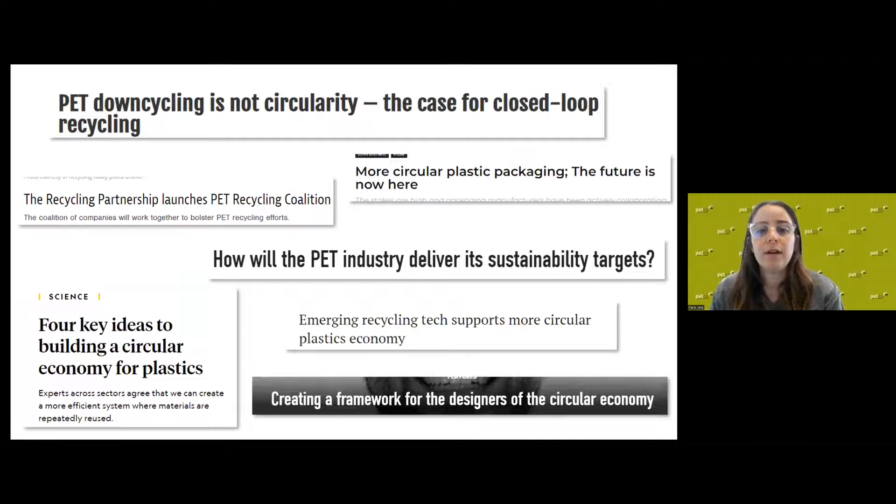However, the challenges don't only exist in South Africa. This is the global view of what's happening today. Circularity is an international challenge, as we can see from these various headlines on the screen. Looking specifically at design for circularity, the legislation has outlined targets for inclusion of recycled content, including rPET, into packaging. If producers don't design products to be recycled, there will be a lack of rPET in the market, and producers will not be able to be compliant under the legislation.

Here you can see that there's a target in year one for 10% of rPET inclusion, and this jumps to 20% in year 5, which is obviously a doubling of that amount.

According to the legislation, producers must also conduct a life cycle assessment in relation to the identified product in accordance with the applicable standards within 5 years of implementation of their extended producer responsibility scheme, i.e. by November 2026. The life cycle assessment was focused on, firstly, minimization of material used in the identified product. Secondly, design of the product to facilitate reuse, recycling, or recovery without compromising the functionality of the product. And lastly, reduction of environmental toxicity of the resulting post-consumer waste stream.

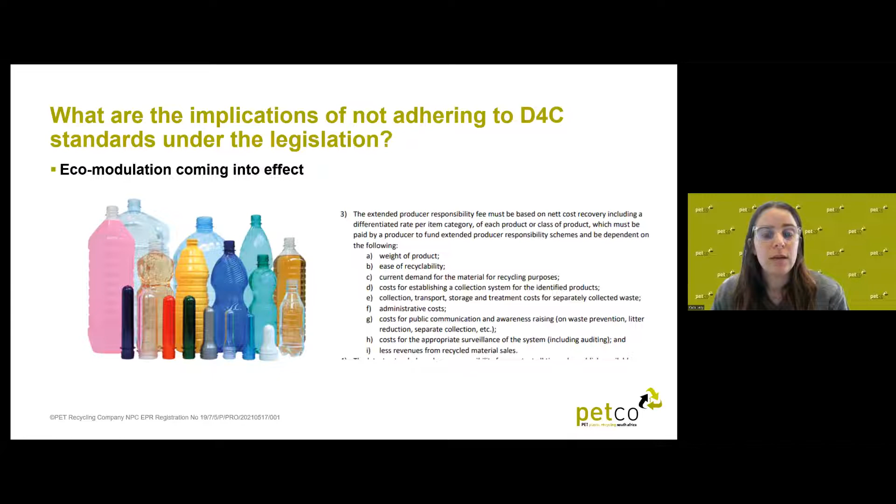As mentioned in section 7.3 of the regulations, we also start to see the implementation of eco-modulation. Eco-modulation is the concept of penalizing the use of materials that are perceived to be environmentally harmful while rewarding the use of those which are perceived to be better for the environment, i.e. more recyclable. This means that individual costs per product won't be cross-subsidized. South African producers who do not adhere to design standards will be negatively affected by this part of the legislation.

To end off, we know that it's hard to reverse the impacts of design decisions once they are implemented. We can't unscramble an omelette. Design decisions often lead to long-term investments that lock producers into a certain model for years to come. As Radjou and Prabhu in their book Frugal Innovation argue, over 70% of the product's life cycle costs and environmental footprint is determined during its design phase.

One potential solution that came out of this is actually this project to use a digital watermark to make your packaging smart, and have a new way of sorting materials. This opens, of course, a lot of new possibilities that are not possible with the current system in any country or any region. But we wanted to make sure this was a system that could be used wherever you want to use it. I'll go a little bit more in detail later on, but the project itself started in 2020 and had the lovely name Holy Grail 2.0. And I put the website here as well if you want more information.

In September 2020, a lot of companies came together to prove the viability of a digital watermark for more accurate sorting. And of course, accurate sorting works on two aspects, the technical and the economical aspect. That's something this project wanted to explore, to see what the possibilities were at that stage.

So if you're not familiar with Project Holy Grail, as the name says, Holy Grail 2.0 is the follow-up project of a study that was launched by the Ellen MacArthur Foundation, a so-called pioneering project, Holy Grail. At the time, it was just called Holy Grail, not 1.0. The intent of this project by the Ellen MacArthur Foundation was to start screening and thoroughly investigating all the different innovations to improve post-consumer recycling.

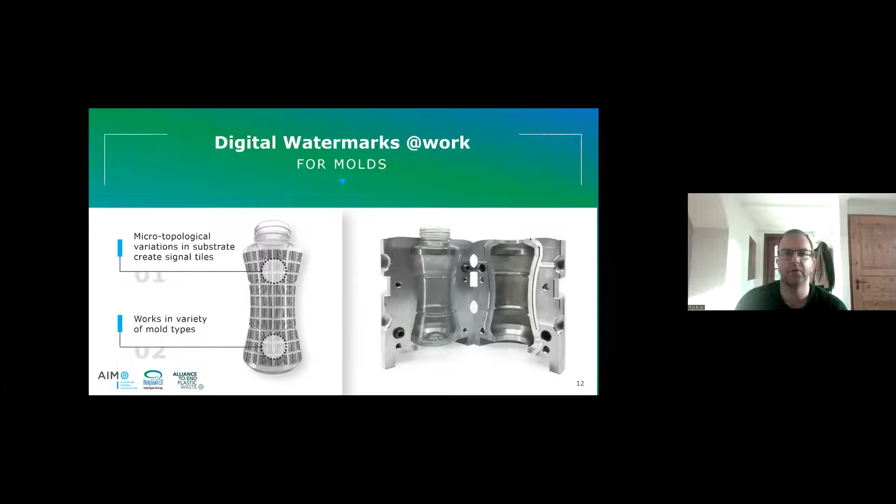And then as well, of course, the dividing between food and non-food can give a lot of advantages there. Beside all of this, of course, there's a lot of data work that needs to be done. And of course, if you can share information with your consumer, that's a big advantage as well.

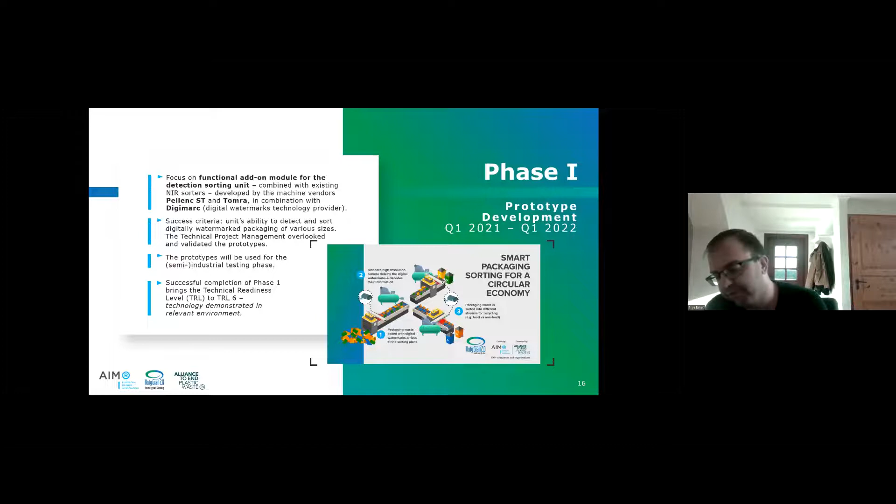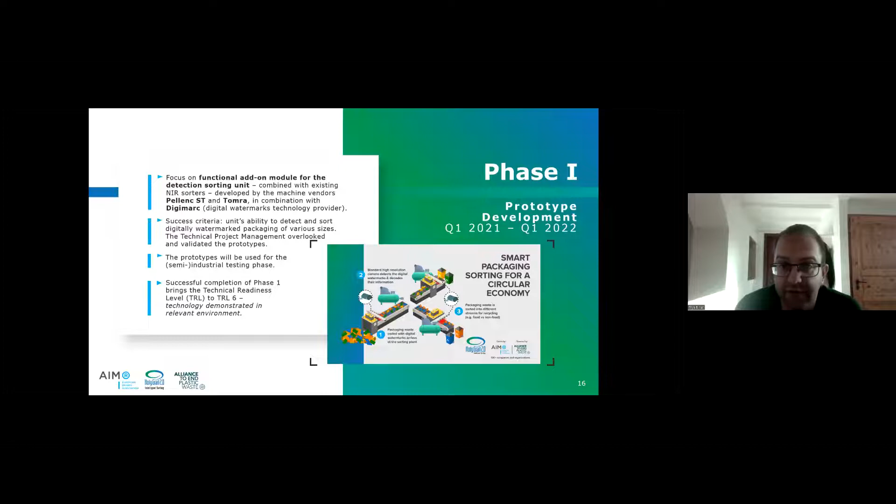So we worked with two partners in this, Pellenc and Tomra, that worked with Digimarc, who is the provider of the digital watermark technology, to actually make sure that we have an add-on prototype module that could work and see, okay, can it detect and sort out products of different sizes, different quality. So again, being crumpled down, or have some material that needs to have those different codes put together in there, and actually have this ready for a next step, which would be semi-industrial testing.

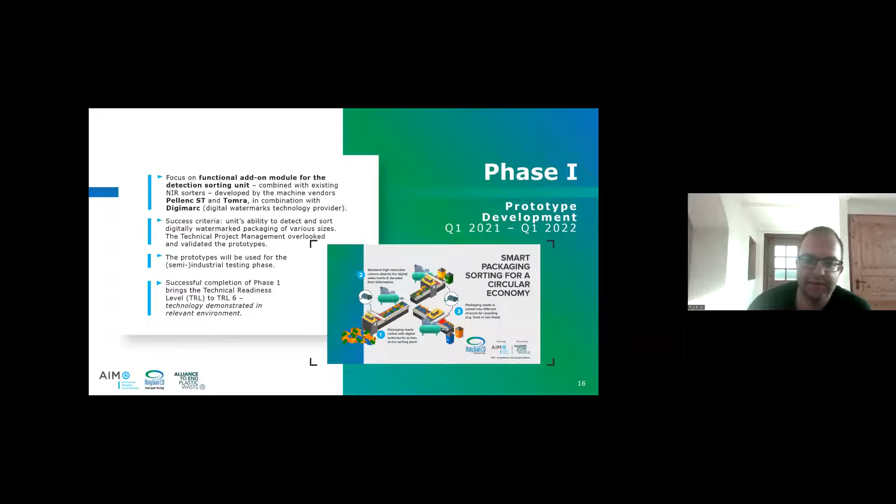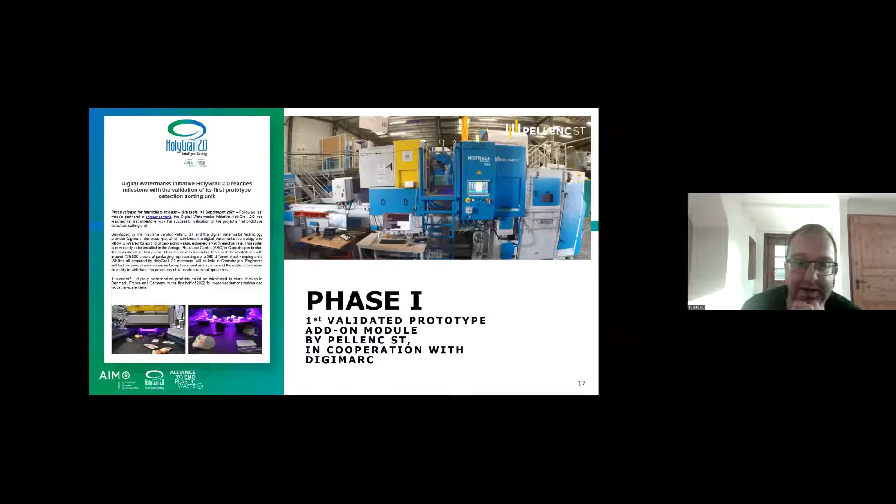And the reason why I'm here, we had that first product validated by Pellenc, that we had our first prototype unit, which you can see here on the screen, that was developed and actually had extremely good results. So we did a series of testing, and we came up with a detection rate which was higher than 99%, and a correct ejection rate of 95%, which is an excellent result for having

this add-on module. Of course, this was so-called lab scale at a lower speed, and with products that were added in there without the traditional dirty materials and so on. But you can see on the screen that these were products that were crushed and not in the ideal situation.

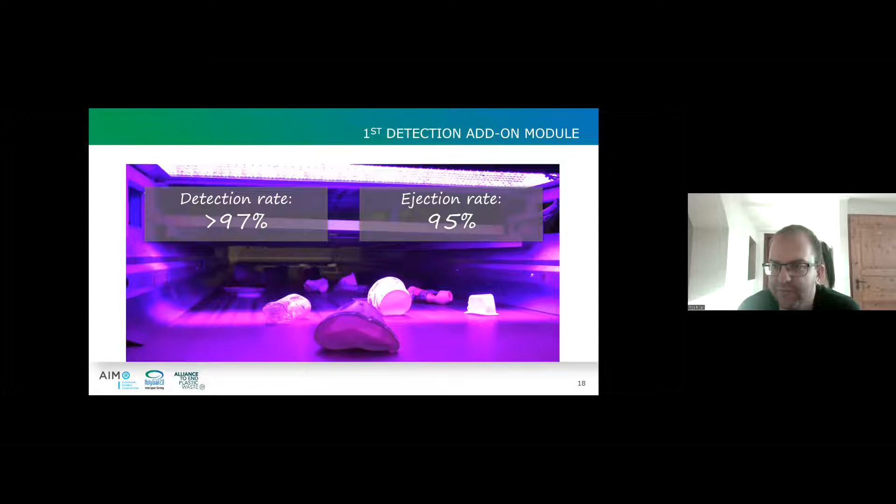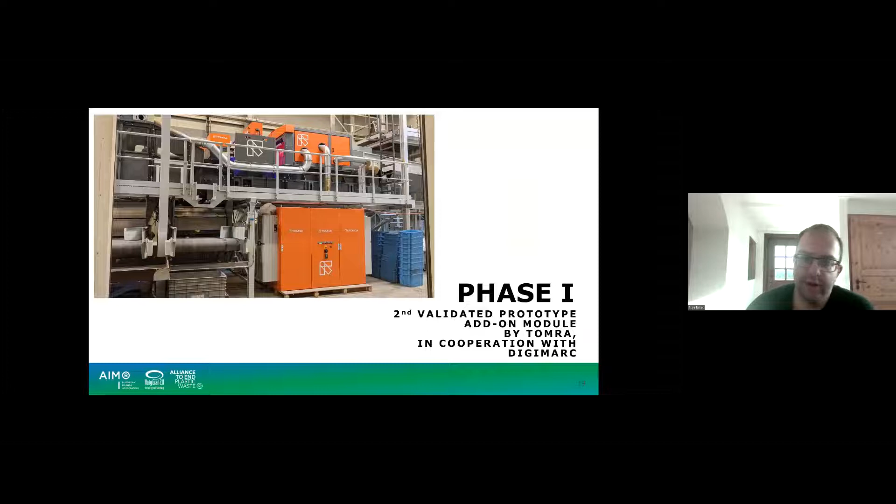Now, an important part here is that we don't want to have this as a sole technology from one provider. So we worked with two machine manufacturers, as I already mentioned. The one I showed you was from Pellenc, but we did the same work in parallel with Tomra working on this add-on module. And again, very happy to say that this gave exactly the same results. So a very high detection and ejection rate in all of these different products. So this was a very nice start of the project, where we know, okay, technically this works on small scale, and we can go forward, but we don't stop there, of course.

So this moves into a second phase of the project, which was the semi-industrial testing. Why did we have to go to semi-industrial testing and not all at once to industrial testing? Well, we wanted to make sure that this works with other materials as well, so not only material that has digital watermarking, and that the software and detection module are actually capable of doing this at higher speeds. So again, accuracy and detection and ejection rate are really key in here, but it's very, very important that this works in real life circumstances.

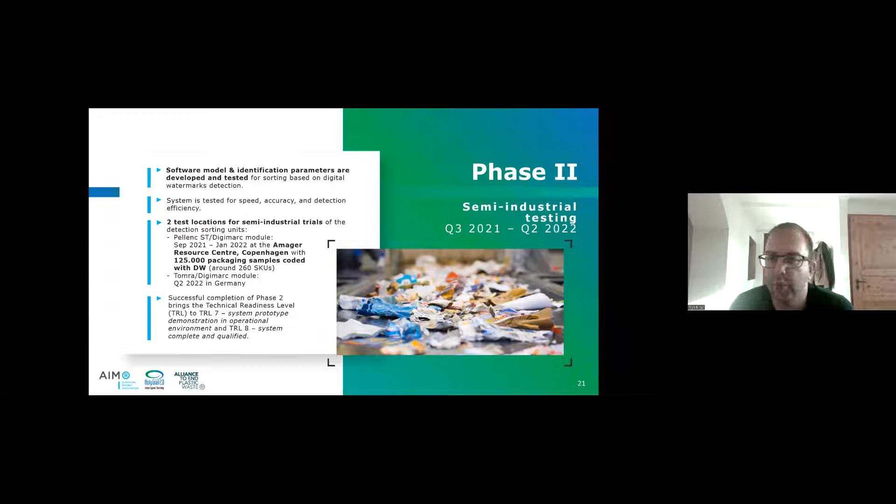So we selected two test locations for this, where each of the units were set. So we had one in Germany and one in Denmark. The one in Denmark was first ready, and actually we used this one in so-called open houses, and these open houses actually showed on a real life line that we had in Copenhagen with that unit, to people that wanted to have a look, this is how digital watermarking works. This is how it's combined, that people could feel and smell and have a good feeling of actually what came out of all this material.

And that was a big success. So we had a lot of media there, a lot of partners there, a lot of interesting brands that wanted to take part in all of this. And the results of this test afterwards also were extremely good. So for this, we had different materials that we put in there, and we also put flexible packaging in there, which was a first as well, where we had extremely good detection and ejection rates, and the purity of the product that came out was really impressive.

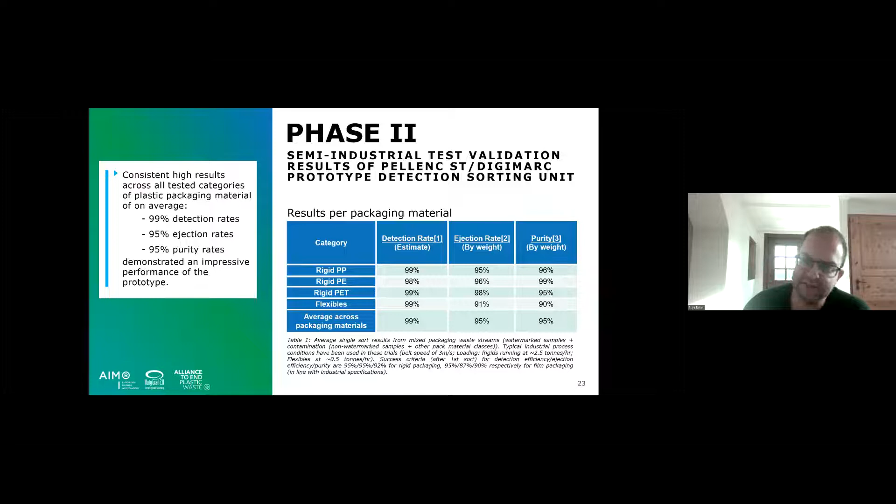So we were very happy with all these results, and even more pleased we were that the materials that we've done in Denmark could be replicated in our Tomra detection unit as well. So both systems are fully capable of going to the semi-industrial speed, having more complex situations. So with the great work that was done by the technical team of HolyGrail, we can make those steps to actually go from a lab scale prototype equipment to the semi-industrial testing.

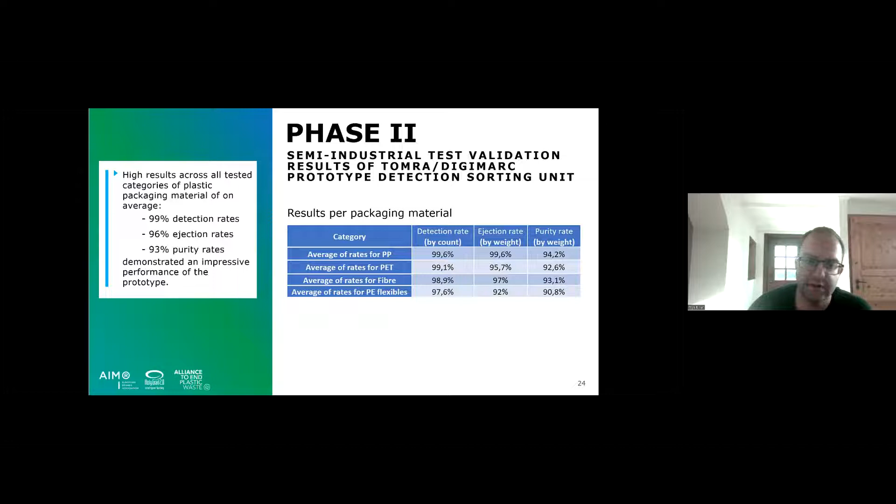Now, of course, this is all in a controlled environment, and I think, as Cara mentioned, we're also here to share things that went well and that we can bring out to other regions as well, like yourself. So for us, the last final version of this project was phase 3, full-scale validation.

So industrial testing, making sure that this works. So those prototypes have been equipped in commercial sorting lines. Again, we used France and Germany for the locations of all of this. So in this case, if you have brand owners that are bringing this enhanced packaging with the digital watermark to the market, we could start seeing them getting into the recycling stream and seeing if we can split them out to make sure that this works in all the optimal conditions in there.

So as we speak, you can buy products on the shelf in different European countries that have digitally watermarked packaging. Customers are not aware of this typically because, as I mentioned, these codes are imperceptible for the naked eye, but we do expect to see more and more of this product coming into the waste facilities and seeing if we can separate them out in there.

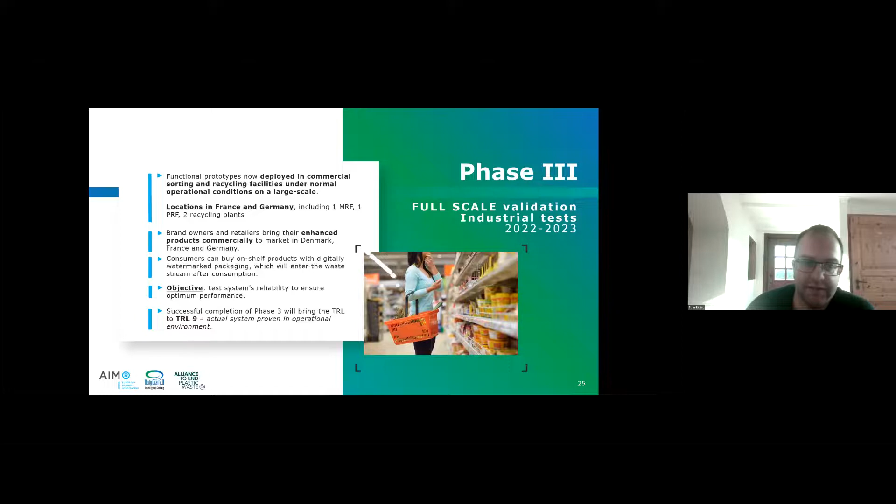So at this stage, the final numbers I got this morning were over 40,000 tons per year of enhanced materials. So as mentioned, we have several test markets, Denmark being one of them, and that material is being shipped to Germany for testing to have a bit of a higher concentration there, but also France and Germany are taking part in this project to make sure that they have all the materials in there.

The plan now is that we're gonna put some additional spiked material in there to see if we can further enhance all of this. So almost 380,000 bottles are gonna be produced and added in real life circumstances, just to see if we can get the information a bit sooner, while we bridge that wait period for customers to actually buy the products.

And of course, this is a very key thing, as I mentioned, the food versus non-food. So we also have a first test plan for non-food RPET. Can we actually remove the HPC products, so the home care and personal care products, your shampoo and so on? Can you get them out of the PET stream that would be intended for food? The partners who are taking part in this are mentioned below, but I'm sure that it's something that we'll be communicating more details on really quickly.

Maybe just the partners that we have in there, so the recyclers. Very briefly, the German facilities are focusing on PET, but we also have one specific example, the Borealis recycling facility, that is taking on rigid and flexible polyolefins, so both polyethylene and polypropylene as well.

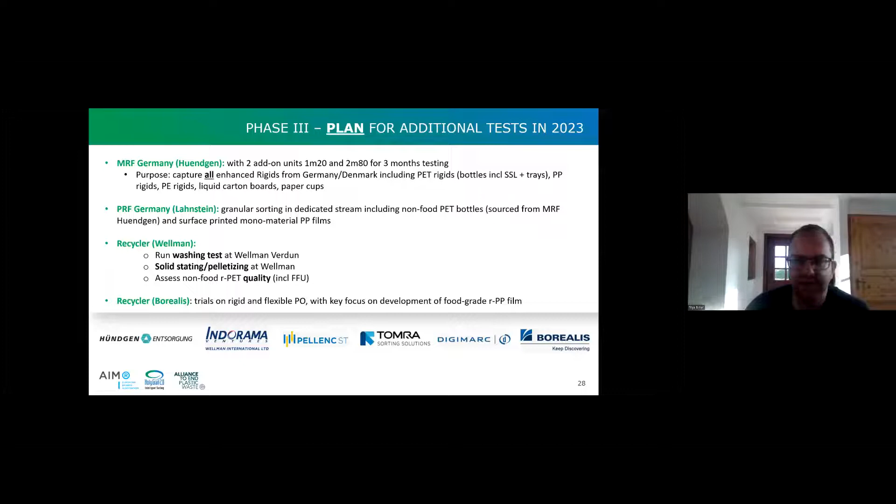And as I'm nearing the end of my story, I do want to emphasize one thing: in terms of data, this is something that is completely integrated in what we already have. So GS1, the data provider you're all familiar with, is involved in this project to make sure that there's a lot of streamlining, and it's not double work that needs to be done. And more important maybe for all of you is that data protection and data security is guaranteed, which is of course a very important part of this.

And I think it fits nicely with the presentation that will come later on, on EPR. We need to be very clear that this is something that is not standing next to it, but combined in all the work that will be done in eco-modulation and further on. And as said, we're also part of this, and we're the partner helping ensure that our friends from marketing like this product as well, and they don't even see it, but we still have the good results.

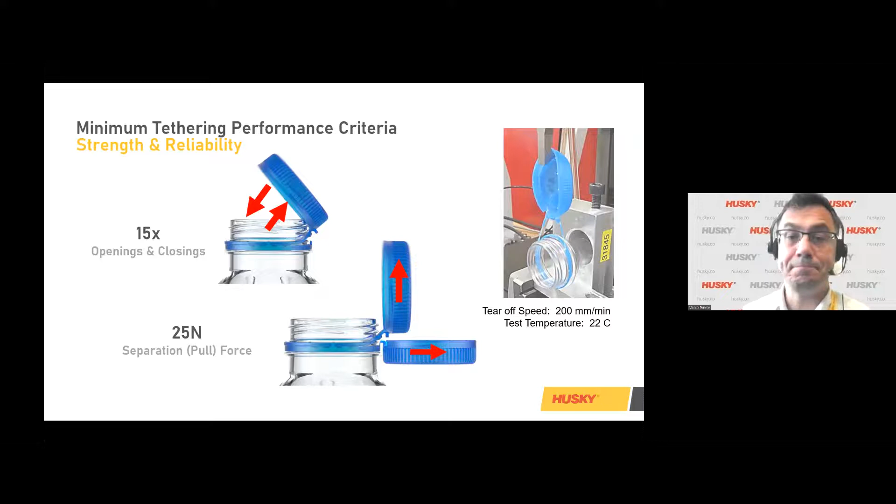So this is the legislative push in Europe, but we see it more as a global opportunity, because tethered closures allow brands to convey a message of sustainability, which is gaining importance in our society, with all brands putting more effort into it. Second, since these closures are significantly different from current closures, they're a nice way to differentiate and give a sense of premiumization. Feedback we get is that in countries where this isn't pushed through legislation, brands and consumers see other benefits—the closure can't be lost, it's not falling on the floor, so there's more hygiene. So tethered closures are also a way to differentiate and premiumize your brand.

The third benefit is it allows for storytelling, meaning that the brand is bringing something new on the market, and this allows basically to do some advertising on that and bring some focus to the brand.

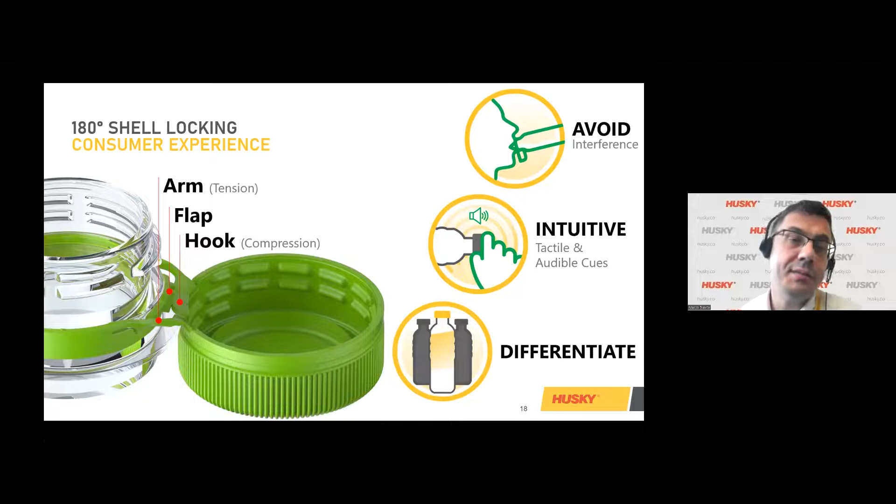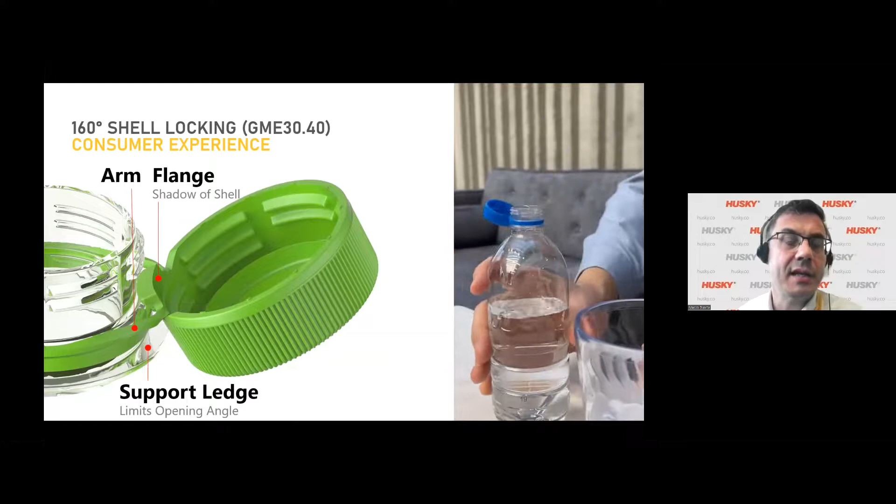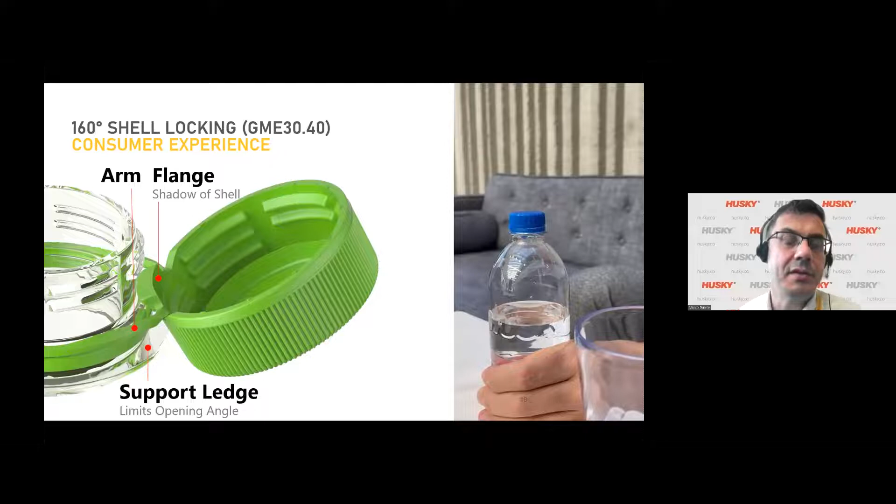So here you see the opening of 2622, which is the new finish planned to replace the 1881. Here the design is slightly different due to the support ledge size selected for this neck, but also here you see that the use is very intuitive, very easy. The closure remains open as intended and recloses very, very easily.

So why is that? We believe that through injection molding, we have certain benefits over other technologies like slitting, because it allows us to realize very complex geometries when needed, as you can see on this picture. These geometries are not easily possible, if at all, with slitting technologies.

Basically this allows us to reach the 180 degree opening using that protrusion on all standard neck finishes. Through the fact that these are molded directly during the injection process, the closure comes out of the mold ready to be used without any additional secondary step required.

The fact that it is molded also allows us to play with radii, with the length of the different elements, to fine-tune the consumer experience - whether you want something more reactive, less reactive, more difficult, or less difficult to open. So a high degree of design freedom.

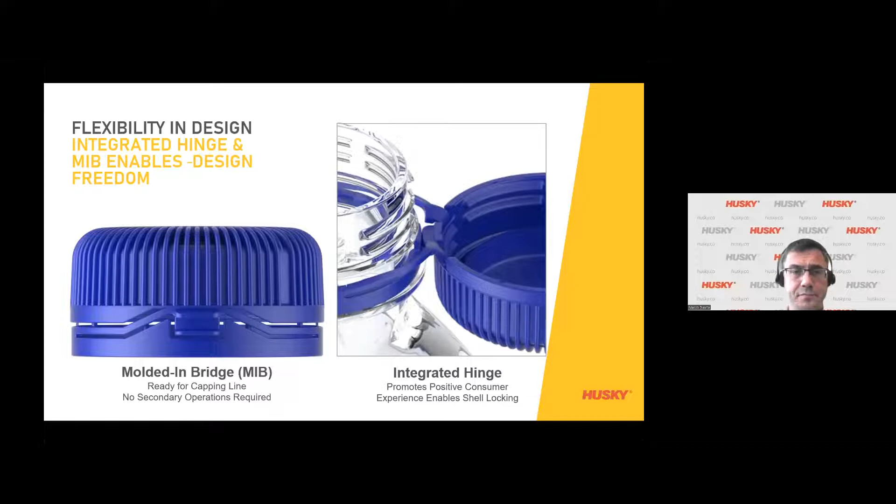The second stage of the use of tethered closures, and this is probably the most complicated or challenging for consumers, is the reclosing.

As now the closure is attached to the bottle, it limits the play that you have to reclose it. And this is particularly sensitive on water closures, where the plug seal needs to be a little bit longer to guarantee function. This is called break before leak.

Actually, what you want is that when you open the bottle, all the bridges that connect the closure to the tamper evidence band are broken before you have a breakage of the sealing. So due to that, you have plug seals that are a little bit longer on water closures. And what happens is that when you reclose those kind of closures, you will find out that there is an interference between the plug seal and the thread finish.

As you can see in this see-through animation, once you reclose it, you see that there is an interference between that plug seal and the closure, and the consumer basically needs to manipulate the closure, lift it up before he can reclose it.

So to overcome that and to make the reclosing very intuitive, what we have added is a cam inside that basically guides that closure into its final position when you reclose it. It is a very simple one-finger reclosing that allows the consumer to place the closure very easily in final position and reclose it without any difficulty. So this is another example of how we have really kept the consumer experience in mind while developing these closures, and have included these features to maximize positive consumer experience.

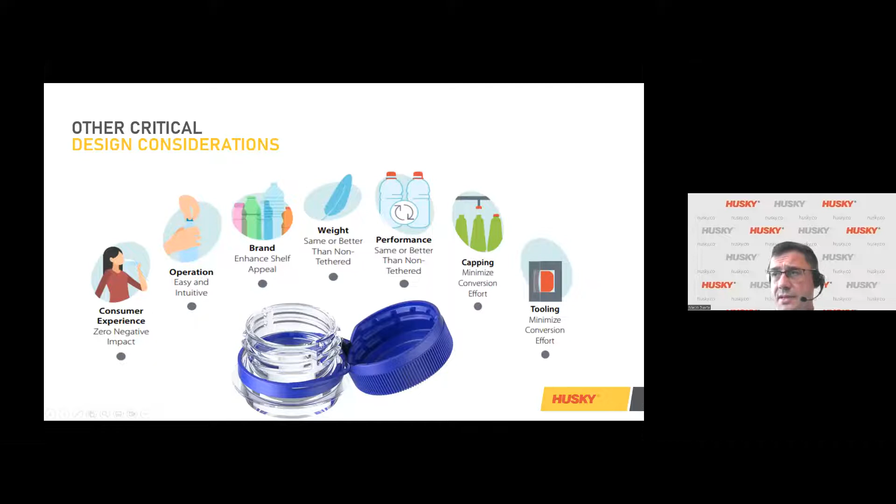So we were discussing the different phases of the closure. We discussed already 3 of them, from consumer experience over the intuitiveness of the operations and the brand appeal. But the other things that are important about the closure is that obviously you want to minimize the amount of plastic that is used, so we always keep weight top of our mind. The performance of these closures need to be as good or better as the non-tethered versions. We don't want to have any negative impact during the capping process. And obviously for converters, we also looked at ways to minimize the conversion effort.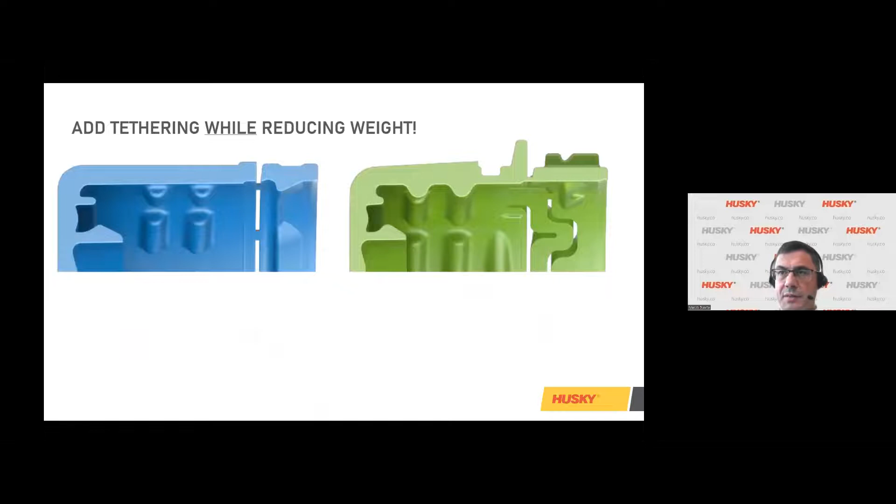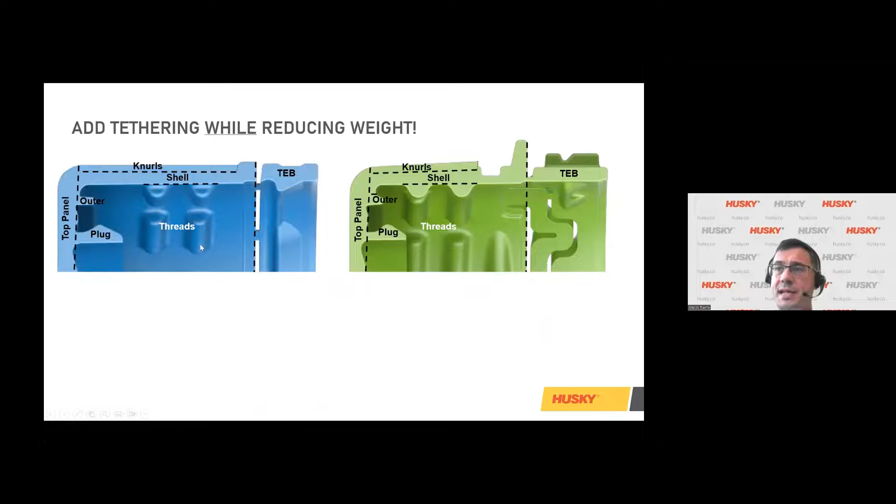So here I'm just showing what we call the waste wheel. So when we developed the tethered closures, what we did is we dissected the closure in its different components, and we have invested heavily into simulation software and capabilities in order to validate what implications it would have to remove weight in certain areas. So we took the example here of an 1881 closure non-tethered that we have in our portfolio for the Coca-Cola.

And when we developed the 1881 for Coke in the tethered version, we were able to basically remove weight from areas where we probably had over-engineered the closure, and basically come to a tethered version of an 1881 with added functionalities, with a weight which is reduced by 0.2 compared to the historical Coke closure in non-tethered version.

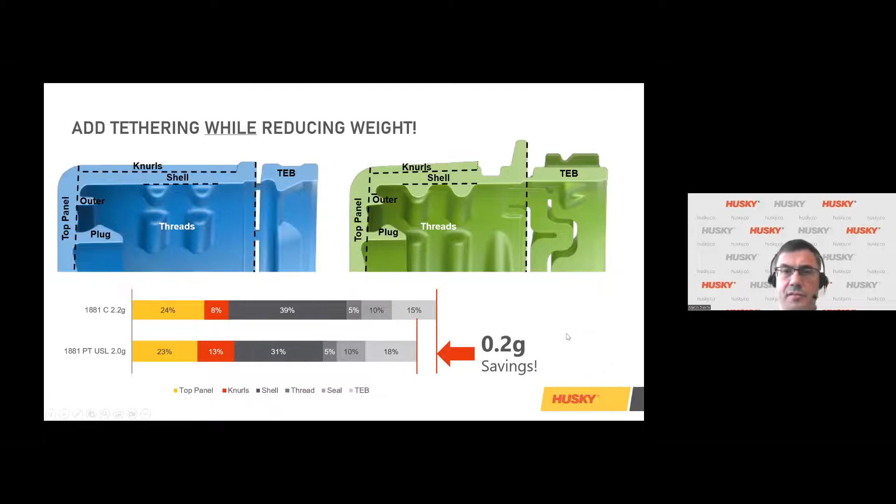So how does our development process look like? We always start in the virtual environment. What that means is that you would start with what are the neck and closure specifications required. We would then design the closure, and as Husky is providing preforms and closures, we are also able to design non-standard neck finishes and closures. We would then design the dispensing system.

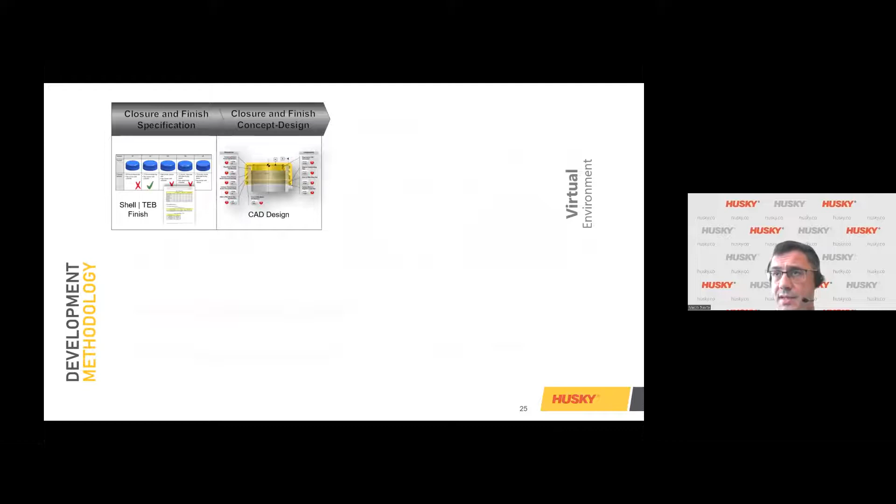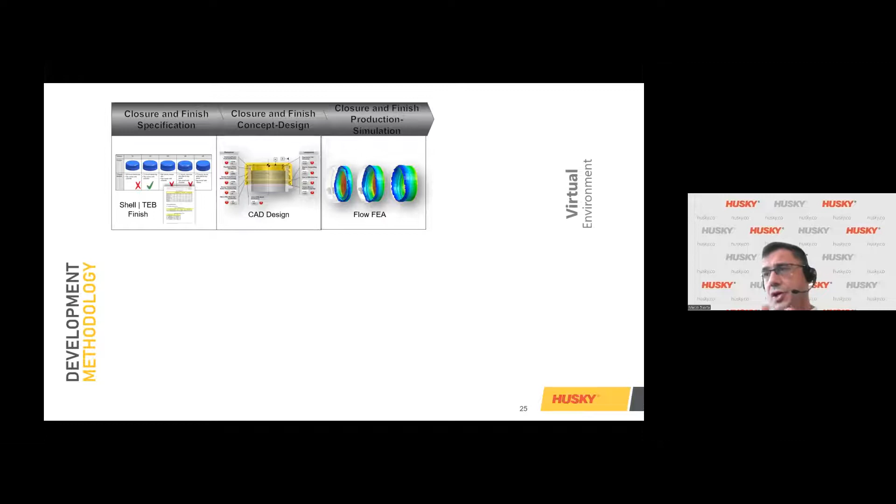And then we go into simulation work. So we simulate everything from the injection perspective, whether it's the ejection profile, the temperatures at exit of the mold, the ejection of that closure, the post-mold cooling. So basically we do all that to make sure that the closure, when it gets out of the mold, has the geometry as we have it per design intent to be able to meet with all the requirements on the plastic part.

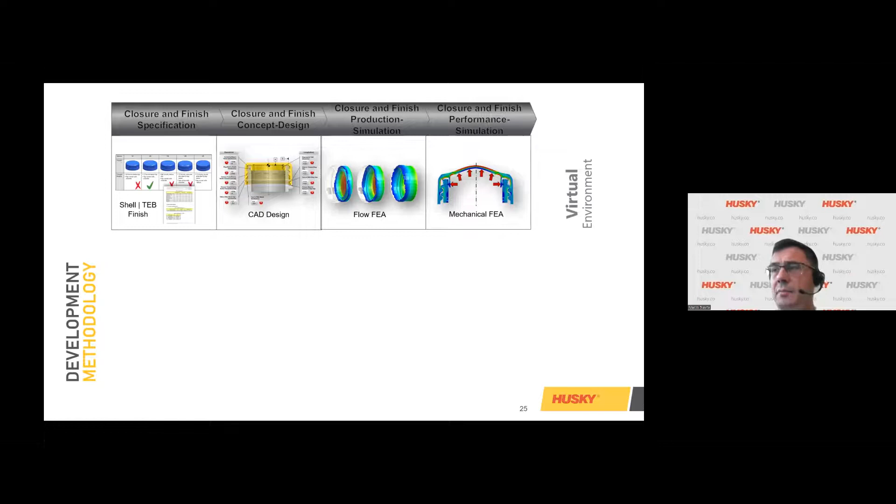The second phase, we validate that the plastic part that is being molded with the given geometry will withstand all the performance requirements, whether that is opening forces, venting performances, sealing performances. All of that is simulated. And we do as many loops as needed in the virtual environment so that we are happy with the outcome before we go in the real life physical environment, which is then we build a pilot mold.

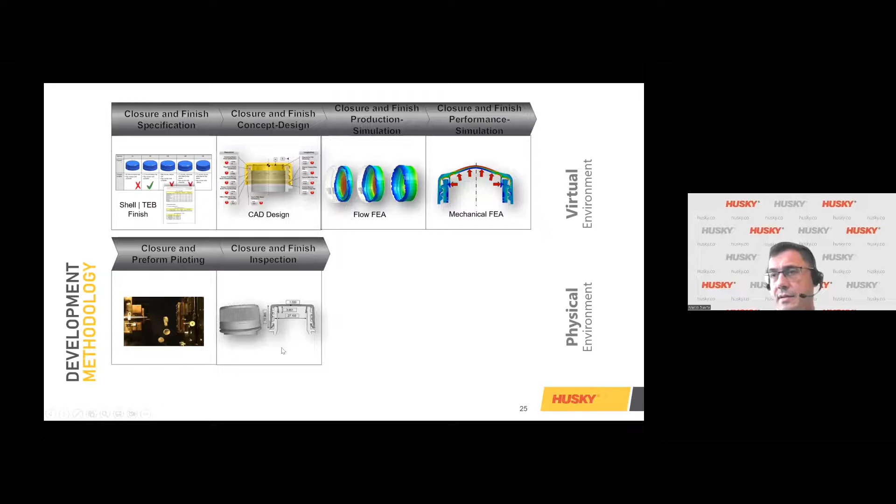So we're using 1 to 4 cavity molds. We inject that, we validate the injection process, we validate that actually the geometry that is molded is meeting the design intent through scanning - we have 3D scanning of the plastic part. We do all the validation in our brand approved labs, and finally we go into a line and validate the closure on industrial line. If at any point there is a refinement required, we reinitiate through an FEA to validate the modifications required, and the loop continues on.

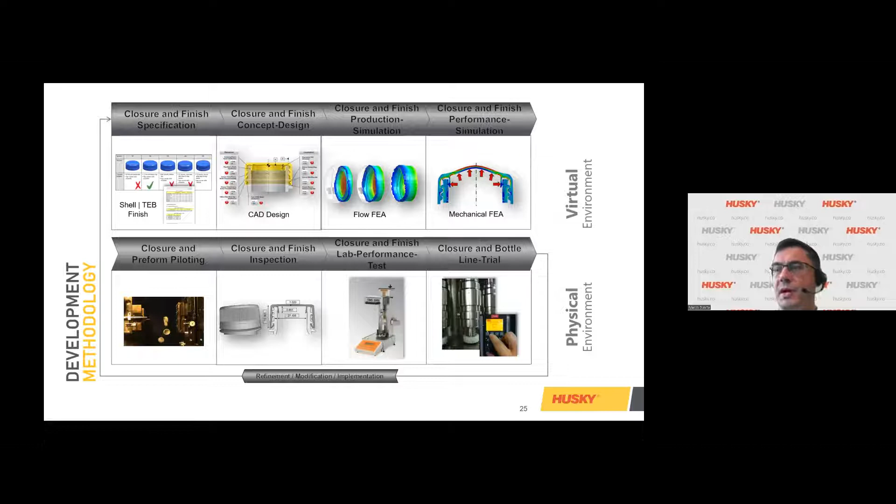Also very important when you go with tethered is to verify the implication it has downstream. So we try to minimize those, and for all the systems we have shipped so far, and the line trials we have done with pilot phases, the only modification that was required was minor adjustments on the line, whether that is the guiding rails or the sorting, or changing chucks.

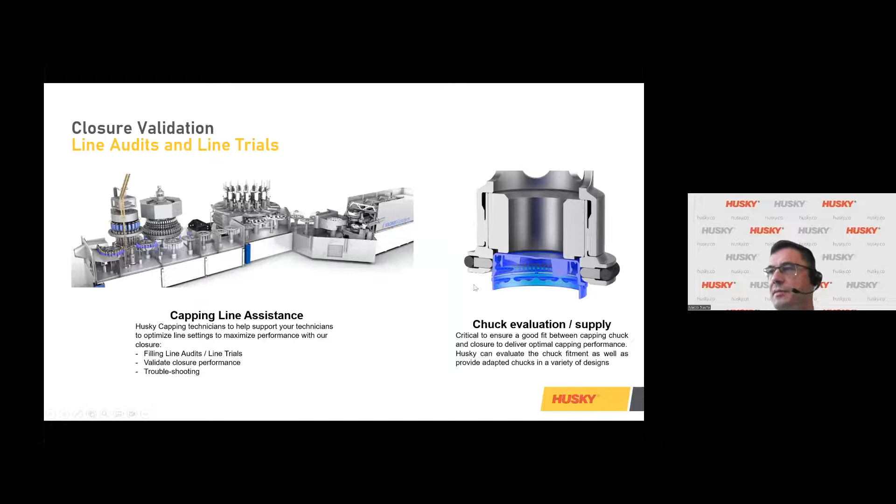So the change of chucks is something that is very common in the industry. As soon as you change the closure provider, those have slightly different dimensions, and if you want to maintain efficiency, you often need to change the chuck. And also here we have developed capabilities to provide chucks if needed.

So with that, basically, what I'm trying to say is that when we develop tethered closures, and this is as important for Europe as outside of Europe, we put a lot of focus on the consumer experience, but also on the efficiency for the producer, which means minimizing the waste in the closure, validating through flow and mechanical simulation, so that we can manufacture and test, minimizing the number of iterations required, and then guaranteeing the speed to market right the first time.

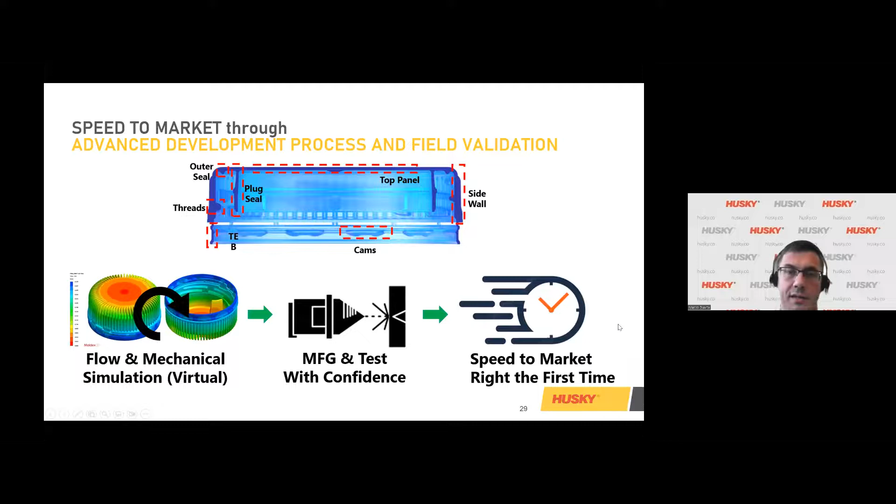As I mentioned, for converters, specifically in Europe, where this is driven by legislation, the change to tethered closures comes with a requirement in investment. And this is particularly important for converters that are providing for different brands. So when we developed our closures, we also kept flexibility in mind.

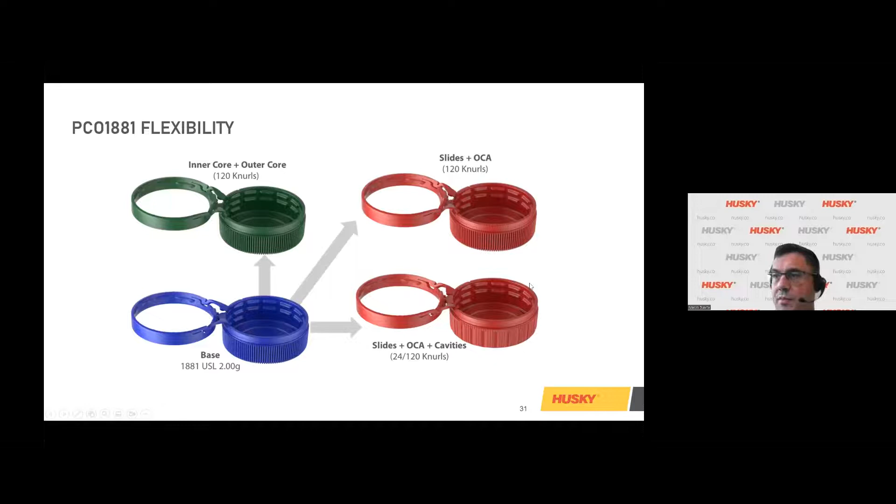And if you look at the GME 3040, which is the new neck finish for CSD that has been developed in collaboration with Coke, also here, we start with a Coca-Cola closure, swapping certain components, we get a Pepsi validated closure. And just with the change of slides, we can go from one with protrusion to one without protrusion. And with the change of cavities, we can go to a light version of that closure that goes from 1.85 to 1.7 gram.

And why would we do that? Well, that neck finish here has been developed to withstand very high carbonation levels, up to 5.2. If that is not needed, we could shave off 0.15 gram of that closure, just simply swapping cavities. So here's another illustration of how we kept also the investment requirements from converters in mind when developing our portfolio of solutions. I'm mentioning down here Tethered Ready. What is that? So we'll show how that works in this next slide.

But here the idea is that for certain brands that are considering moving from 1881 to 3040, they might not want to do two steps at a time, where basically they would go with a new neck finish and tethered closures. That might be potentially too risky for them. So what we have here is what we call Tethered Ready.

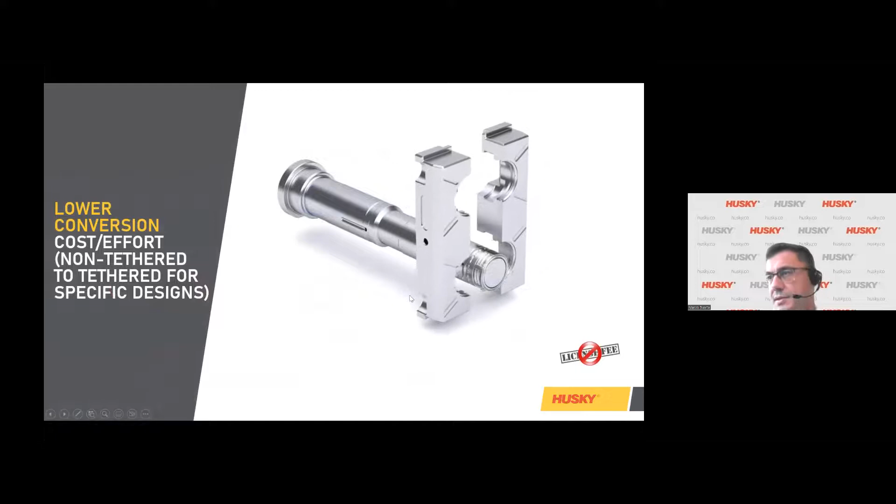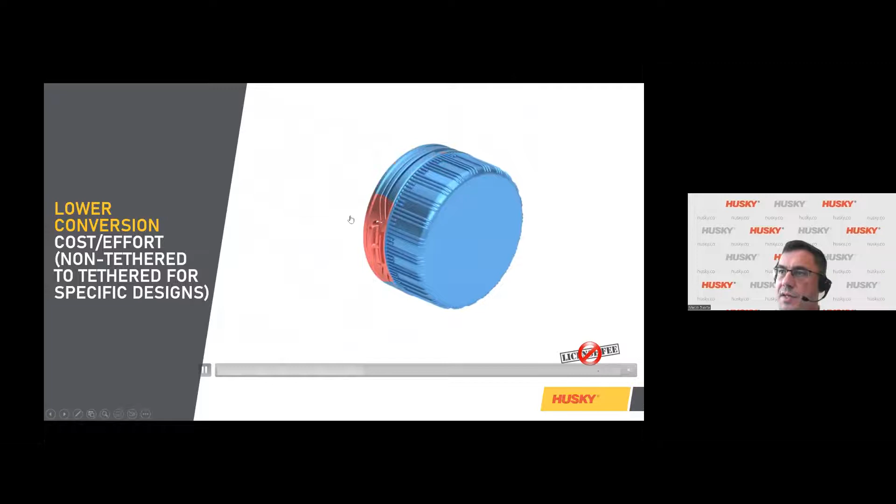So how does that work? You can see here this illustration. We are injecting, in this case, a tethered closure. You see that the tamper evidence band is done by this component, the slide, and the whole tethering mechanism is molded with the slide only. So everything is in that part. So you see here the tamper evidence band, and that the whole tethering feature is within this slide. And you operate the tethered closure.

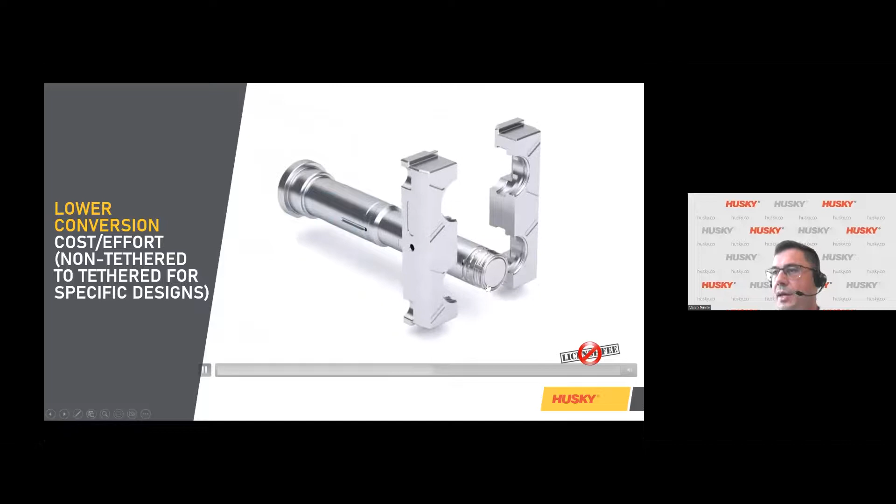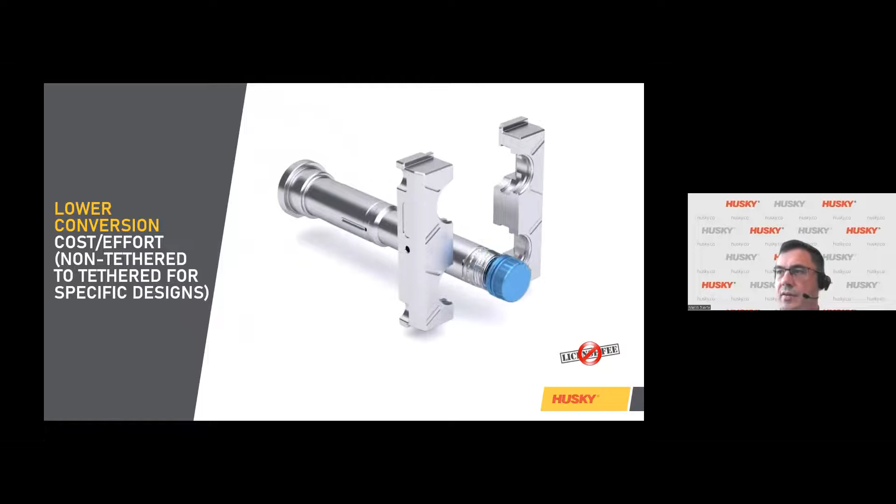So now imagine that we just mirror this slide with the same geometry as that side, so without the tethering mechanism in it. So now you inject that closure, and as it comes off, obviously the band has no tethering mechanism in it anymore. And when you open it, all the bridges break, and you have a very standard closure.

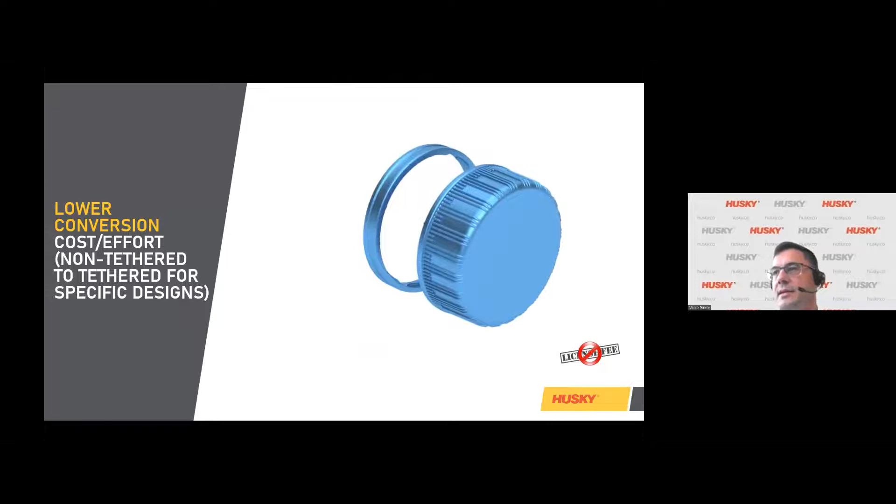So if you know upfront that potentially at one moment in time you want to go to tethered closures, this technology here allows you to be tether ready. So start with a non-tethered closure, and then, swapping slides, you could go with a tethered closure.

So here, this slide just shows our current portfolio of tethered solutions in the three main segments. Water, so you have SNAP solutions that you might know from Europe, and then solutions for 2925 and 3025. So as I said, we are always developing closures that are very competitive in terms of weight and that are

validated by big brands. In CSD, we have solutions for the two main neck finishes, 1881 and 26 millimeter GME 3040, or even the lighter version, GME 3037. And we also have a solution in 38 millimeter neck finishes.

And the portfolio is always expanding, so we are now adding versions without that protrusion that are also opening at 180 degrees, and a series of closures for Coca-Cola, and a no protrusion version for 38 millimeter. Also here, they will all be based on standard neck finishes approved by Cetie and with brand level performances.

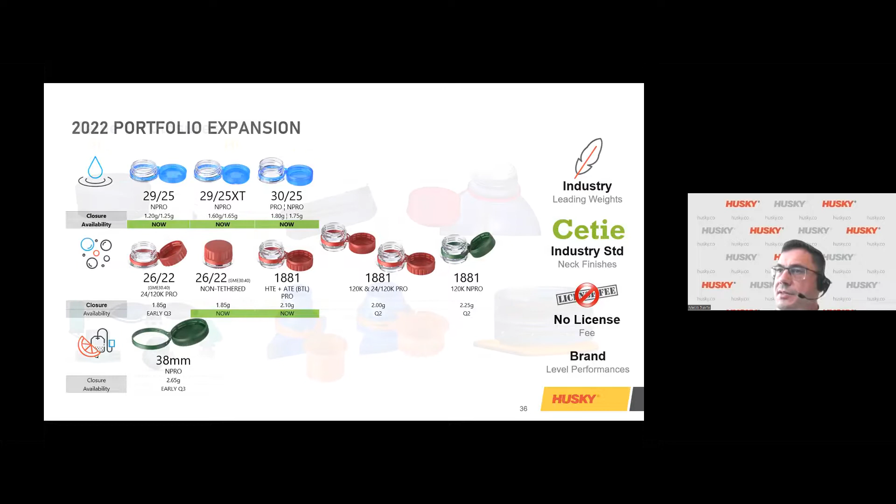What is also interesting to mention here is that we see tethering going into adjacent markets. So in Europe, you need to know that also HDPE bottles, pouch fitments, carton packs, all of these single-use packages need to have tethered solutions. So we have been developing solutions for these packages too.

And we basically just added our tamper evidence band on the closure from the customer. That was the only change required, with the addition of this ring on the HDPE bottle, and we had functioning closures at the second injection in our piloting lab.

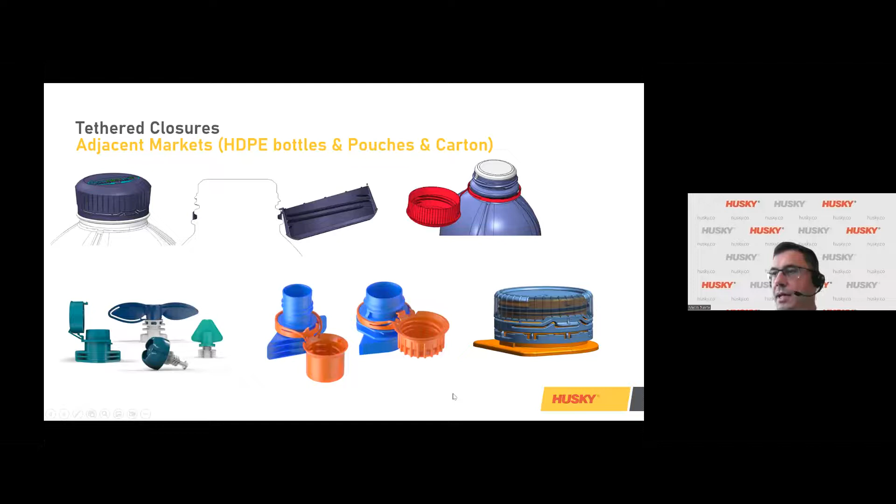So here it's always a collaboration with the customer, where the functionality of the closure we don't touch. We only come and replace the tamper evidence band, modifying it together with the customer to add our tethering features.

So in short, the value proposition for tethered, and why this is also interesting in areas outside of Europe where it's pushed by legislation, is that it provides a nice consumer experience with a 180 degree opening and locking experience. For the operation, we did everything possible to make it as intuitive as possible. With the example I showed with the reclosing feature, it allows the brands to differentiate, especially when you implement this where it's not being pushed by legislation.

And as I said, we have a lot of activity in Southeast Asia, in Africa, and in the US. We have solutions that are weight neutral. They comply with what we know today from the European legislation. The performance is not impacted.

What is nice is that when you go with an injected closure, you have a certain design freedom, but as important, as soon as the closure falls off the injection mold, it's ready to be used without any additional step required. So as I said, we see a lot of interest from our customers, but we also get contacts from brands and resin suppliers from every part of the world.

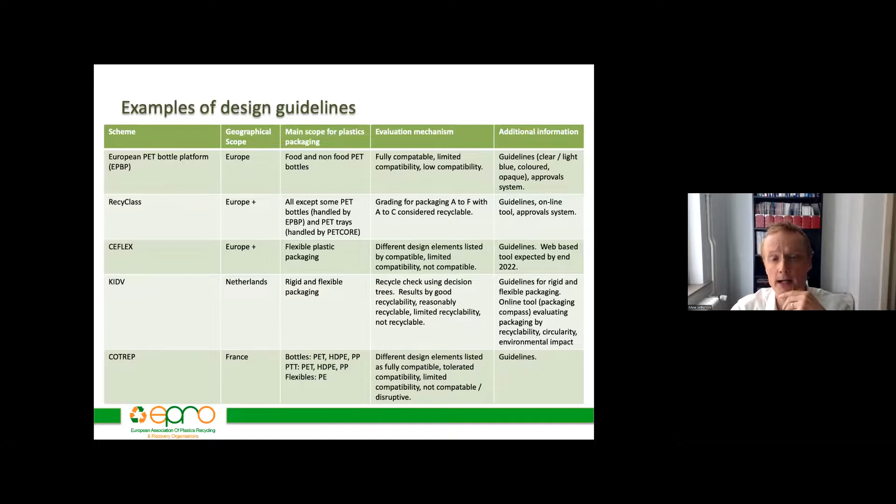And then on the right, you can see that there are a range of different mechanisms. Most common is just to provide guidelines. Second to that would be an online tool, and third would be a certification in terms of how often you see those different approaches. And several of the schemes here use a combination of those.

Now, what I'll try and do very quickly here, in the next few slides, is look at how this recyclability and design for recycling is being implemented in practice in the EPR systems and the PROs within Europe. As I mentioned in the legislation, it's a requirement now to use fee modulation, or more specifically, it will be by the 5th of January next year. And it's still very much in development in Europe, but I'll try and give you a flavour for how it's used.

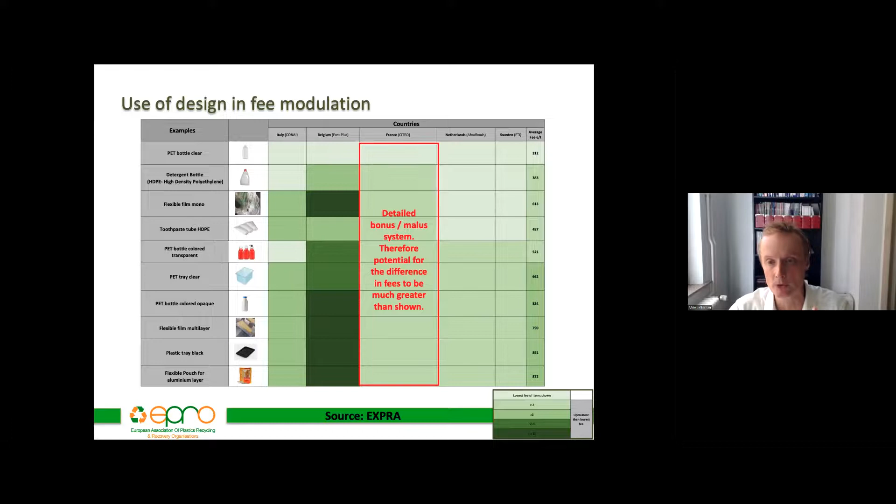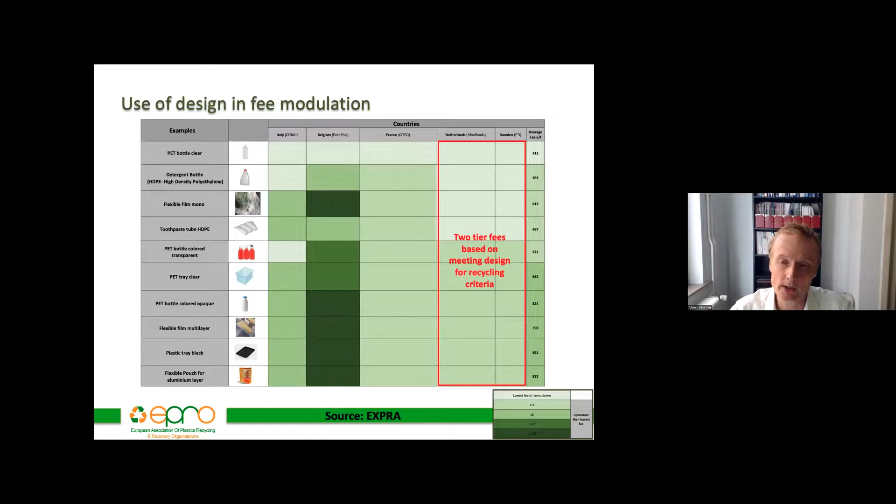Very quickly, I've said that this presentation could be circulated afterwards if people want to look at the detail, but I'll just spin through it very quickly. In Italy, the eco-modulation is mainly focused on how established the sorting and recycling supply chain is. In Belgium, it's very, very granular and per product type, and that's overlaid with design criteria. In France, again, there's a very granular system of bonuses and penalties, both covering design for recycling and the use of recycled content. And in the Netherlands and Sweden, they have quite complex design criteria, but it's a pass or fail in terms of whether or not you would get the lower rate of the fee.

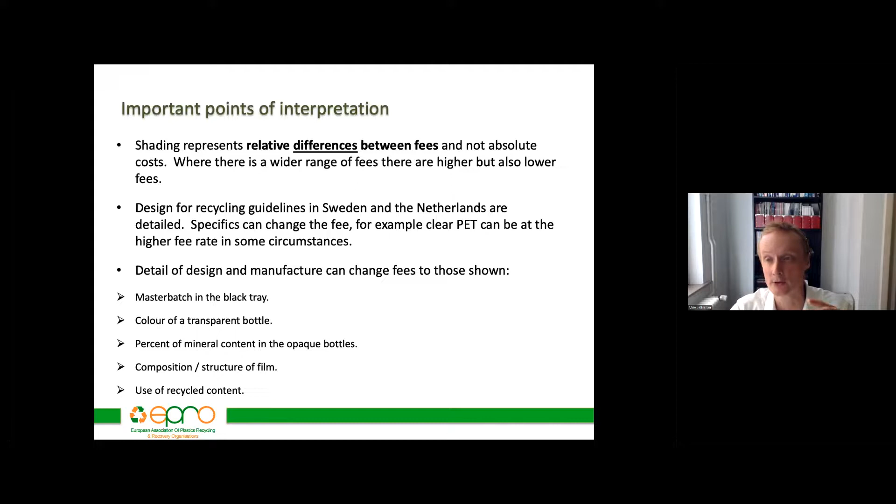Just some caveats. As I mentioned earlier, the shading doesn't mean expensive in itself. It means difference between the lowest and the highest fee. So for example, if I take Belgium, it has some dark colouring, but actually it has some of the lowest fees for things like PET bottles. So it's just that the difference is bigger. And also, I've been simple in terms of the information, in the sense that you can change the grading depending on the exact detail of the product structure. And finally, I should have mentioned, this is actually something that was done by EXPRA, and I was working with EXPRA on it with a different hat. EXPRA is the Association for EPR schemes in Europe, but they also have members outside of Europe.

So moving on to design for recycled content. So historically, this has been done to reduce cost. People have bought recycled material because it's been cheaper than virgin material, and if we look at the last 20 years, that's kind of been where it's fitted in. That's changed in the last decade. Primarily, I would suggest, driven by companies' CSR strategies, many related to PET beverage bottles, as those brand owners try and use recycled content. And we also now have those legal targets coming in that I've talked about. But we also have in Europe plastics taxes coming in. There's not time to go into the detail of those, but we have one now operational in the UK, and they're due to be operational in Spain and Italy in 2023.

And simplistically, the lower the recycled content level you have, the higher fees that you pay. That's certainly the case in Spain and Italy, and in the UK, it's a slightly different system where they have a de minimis. You have to hit 30%. If you hit 30% recycled content, you avoid the tax altogether. And EPR bonuses and fee modulation, increasingly we've seen this, and they can be quite large. They can be 400, even 500 euros per tonne bonuses in some countries now, particularly in France, for the uses of certain types of recycled content in certain products. And what exactly the bonus is does depend on those different variables.

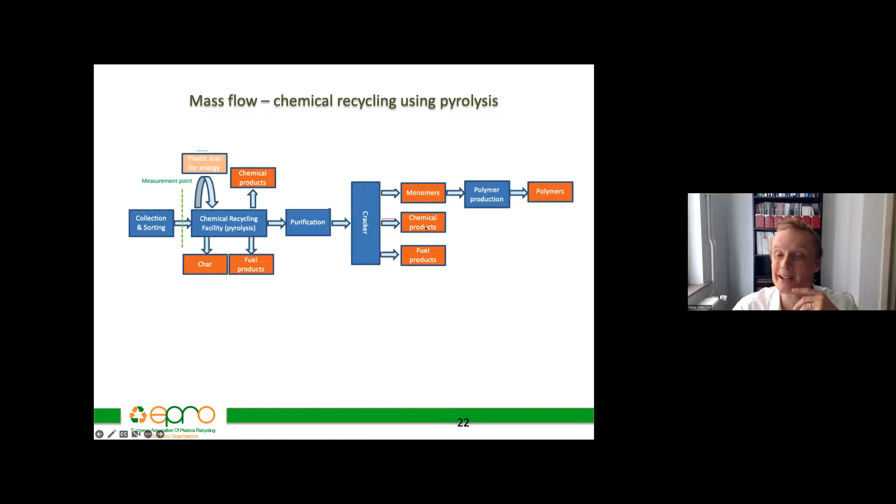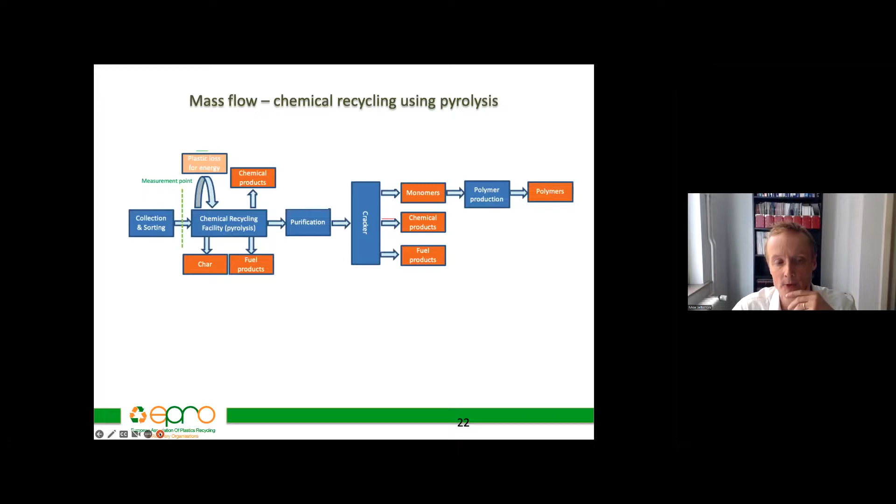And another big discussion in Europe at the moment is what counts as recycling here. If you put one ton in at the beginning, how much of that one ton can you count as recycling, and how much can you count as recycled content? Some of the plastic is used to power the process, typically, so you lose some plastic there. There might be fuel outputs, and under the European definition, if your product is used in a fuel application, it doesn't count as recycling, so probably that has to be discounted. And do you count the chemical products here? It would count as recycling under the European definition, but it doesn't actually go back into plastic. So if you're talking about recycled content, can you count this tonnage? So these are very active conversations in Europe. I can't give you the answer to the question, but we should start to see better visibility of what the likely outcome is going to be towards the end of this year, because there's work actively being done on this within the Commission and within the Commission's technical departments.